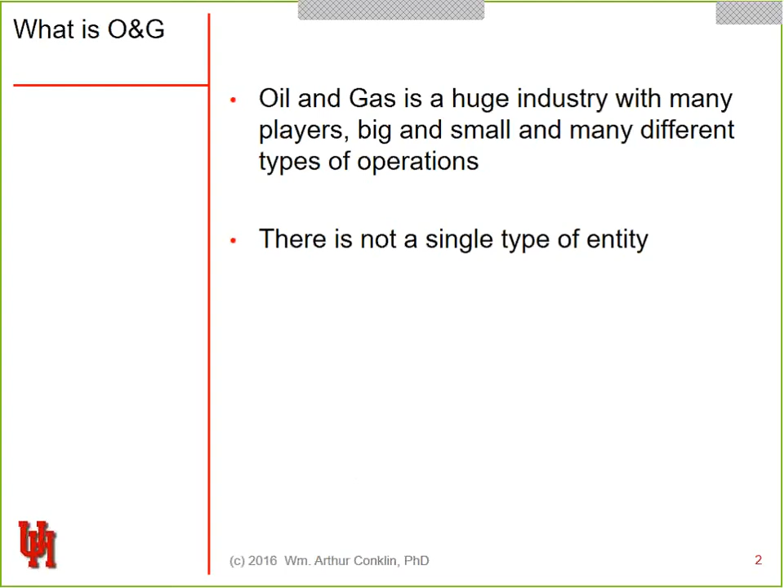And we have many ways of slicing and dicing this industry, and so these are terms you're going to hear all the time, and they're going to be important when we interface with oil and gas companies. Are we talking an upstream operation? Upstream is where we do the exploration. We actually go find the energy in the ground, so to speak. Downstream, once I find it in the ground and I get it out of the ground, I got to put it in somebody's gas tank. Well, to do that, I need refiners, I need retailers, customers. To connect upstream to downstream, I have pipelines. We also have marine segments because a lot of this is moved over the water.

And then we have another major area. It's outside oil and gas, but it isn't. It's called service and supply. There are a lot of companies that exist solely to support oil and gas. So when you have an oil well, say the Macondo well sitting in the Gulf of Mexico that made news, how many companies are on that platform? Tons of companies, and some of them with literally billions of dollars at risk. So it's not just one company.

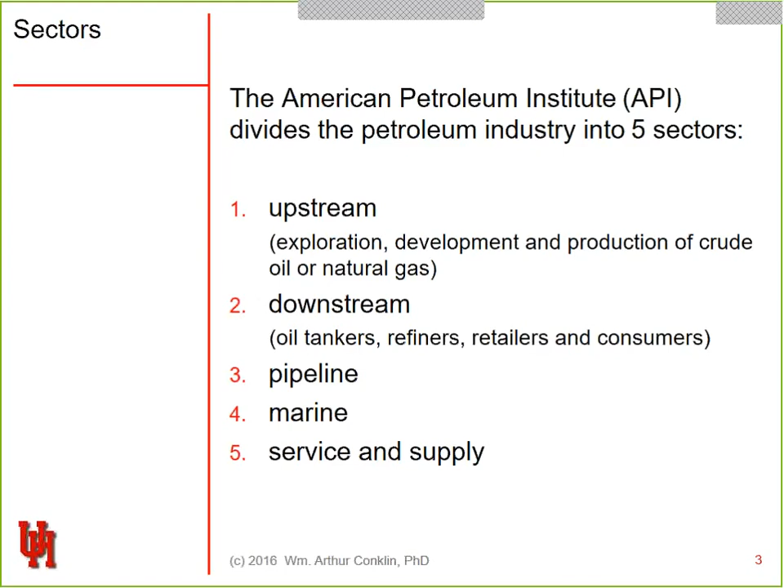You've got a service company that's handling not just the maintenance, but how to make certain that the right mud, the right things are being put in. You've got another company that's responsible because they actually own the lease. You got another company that their specialty is actually drilling into the ground to get the oil for the lease. And so a lot of this stuff is done through cooperative ventures, and you'll see a lot of times where two major oil companies will go together on a cooperative venture in a foreign country to develop something, and then they hire in all these other people. Next slide, please.

And so the supermajors will bid and get rights to pull the oil out of somebody else's possession. And so oil that's sitting in Azerbaijan or Nigeria or Venezuela, it's typically owned by the state in the country that it's sitting in. And then they sell the rights to supermajors to come, in essence, harvest this. Next slide.

Now, one of the things that I skipped when I looked at upstream, downstream, we've got this whole area called midstream now. And realistically, if I break it upstream, downstream, midstream firms are part of what I would call downstream activity, but they're specialized. These are companies that do things like gathering. They connect wells to processing. So I have wells all over, say, the Gulf of Mexico. There are 160 oil or gas platforms in the Gulf of Mexico pumping gas out of the ground.

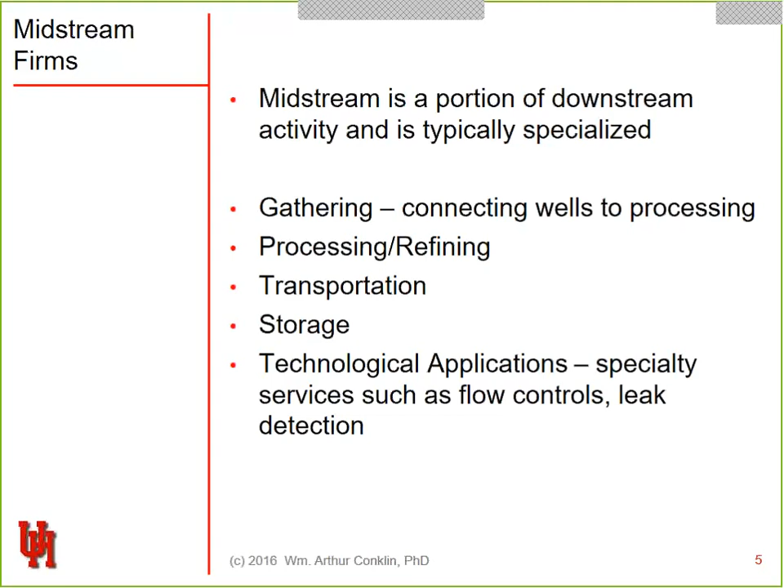And so our air pollution in Houston, where we have all these refineries across all the way to New Orleans, it's actually really good. Our air quality is great. Why? If they let this stuff into the air, they can't sell it. And so they've gotten very, very good at managing this stuff. And midstream firms have had a big role to play in that. Next slide.

So let's talk about what some of these firms are, because I had the Supermajors. These are the ideas of the types of firms you're going to see. Companies like Enbridge, which is a pure pipeline play pretty much, or Kinder Morgan. Then you've got natural gas companies like, for instance, ONEOK, which actually used to be Oklahoma Natural Gas. You've got Genesis Energy. They primarily do storage, although they also have to move it. They're just not a parking lot for oil and gas.

A lot of these companies started in one area. Williams started with pipelines, then they moved into processing and transportation. Typically, companies in the midstream either focus on a gas product or an oil product or some piece of it. There are very few that are large-scale plays.

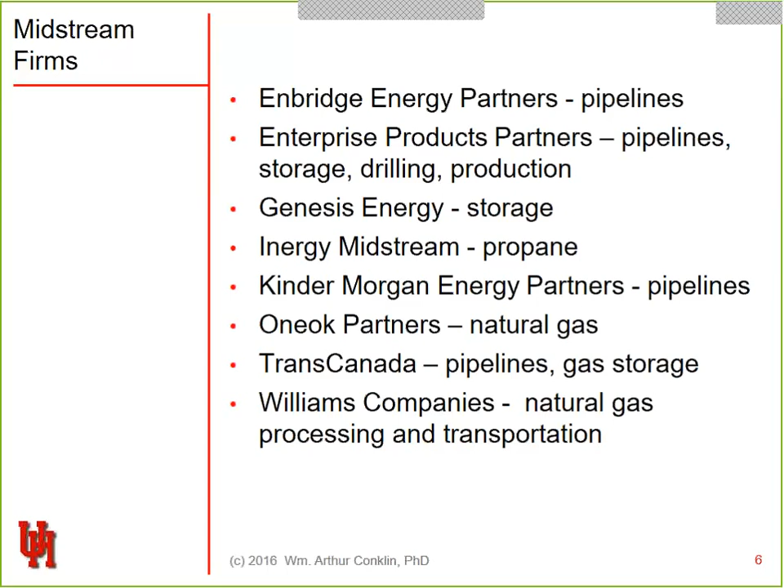The exception to that is Enterprise Products. They do pipeline, storage, they even do drilling and production, and when they buy a refinery, and it's just a matter of time till they do that, then they'll be in refining too. They have built their business by buying different companies though, so it's not a pure, one area of expertise. Next slide.

So what makes all this stuff flow? It's money. But it's kind of an interesting flow of money. First of all, the price of oil is not set by the oil companies, the people pulling it out of the ground, the people that own the ground. It is set by markets. And these markets set it using the U.S. dollar. So U.S. currency and how our government values or devalues currency.

So if we have a strong dollar, that affects the price of oil. We have a weak dollar, that affects the price of oil. And so you have many, many different factors. You've got people out there speculating, you've got demand, you've got supply, and then you have literally OPEC can decide to turn the faucet on, turn the faucet off to their lands. So it's created a ton of boom and bust cycles.

The 1980s, there was a bust cycle. It was devastating to the energy markets worldwide. The firms learned from this and changed. So let's look at the current bust cycle. Right now, we are definitely in an energy bust cycle in oil and gas. The price of oil has fallen to very low rates, but not historic low. A 60% price drop, but they've only done a 30% employment drop.

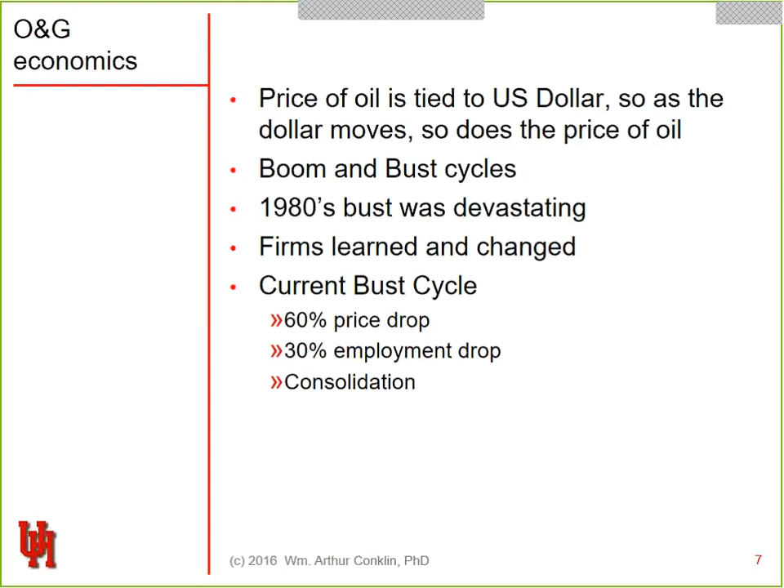The rationale behind that, they expect the price to go back up, and it is too hard to get people back and restart. They've had problems in the 80s getting the oil patch back up and running. The other factor is they've done a lot of consolidation and changing of operations. When I describe upstream, downstream, midstream, these companies all have learned from the past. No one is a pure play dependent on the price of oil. Next slide.

So when you spend $5 billion on maintenance and you do it in 3 months, you can imagine the burn rate. You can imagine how much is set up. Things cost more. So when people start saying, whoa, this stuff's too expensive or they make too much money, you've got to realize that everything has extra zeros just because of size. Next slide.

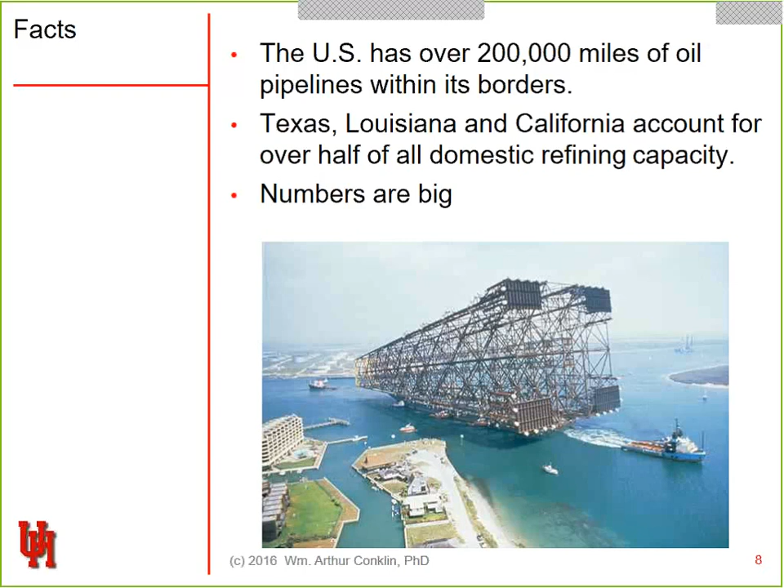aspect. So no matter where the price of oil goes for ExxonMobil, even if it goes down to, say, 25, and OPEC says, we're going to send it to 25 because we want to crush the U.S. oil industry, it will stop us from pulling oil out of the ground in the Dakotas. It'll stop us in Texas. It'll stop us in a lot of places. However, using storage and other sources and reshifting my operations to like chemical production and things, I'm still going to make money.

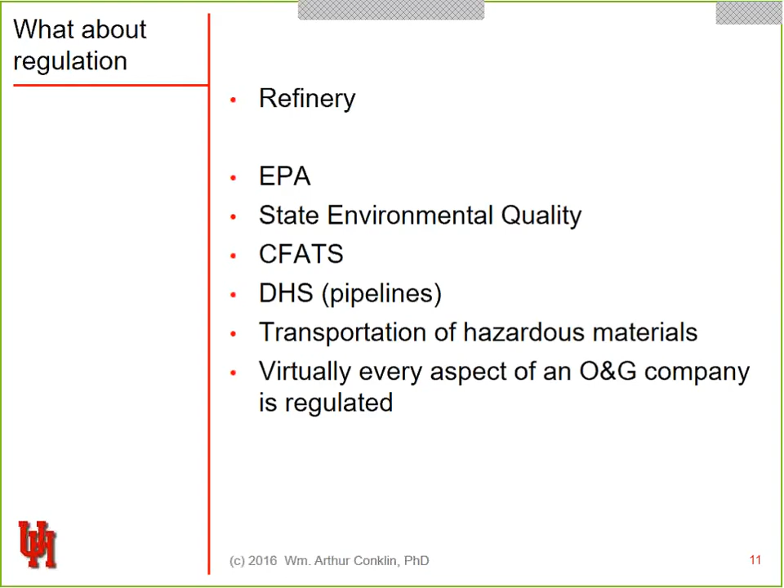Electricity. This whole project started in electricity. Trust me, oil and gas companies understand electricity more than you realize, because most major refineries have cogen facilities on board. The reason they have cogen facilities is because it takes a lot of energy to process energy. And so since they have things that they can turn into kinetic energy, which then can be turned into electrical energy, why would they pay a local utility for something they can generate themselves?

And so most oil and gas major facilities have really been built to be self-sustaining. They own their own ships, they own their own tankers, they own their own pipes, they own their own electric generators, usually gas turbine based.

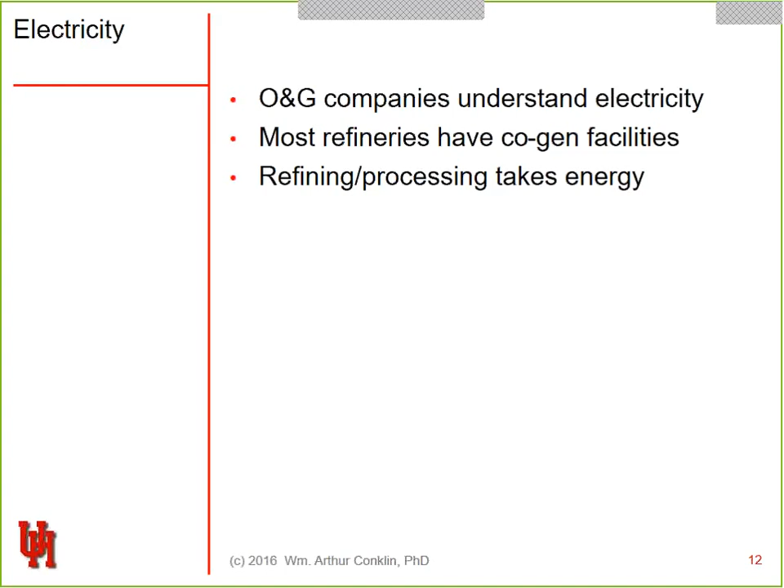They understand how these things fit together. Next slide.

Standards. Way too many to list, but let's look at some of the main drivers. One of their main drivers from, I'll call it, this grant-specific side, from a security, from how I architect things, how I look at my SCADA things, was ISA 99; it's now ISA IEC 62443. They built to this standard and they were involved in the building out of this standard, so most of their systems are in some form or fashion compliant as this standard series continues to evolve.

On the IT side, and these companies have large IT infrastructures, they do play with the NIST 800 series. CFATS gives them a series of standards they have to play with. The killer, though, is the myriad of stovepipe industry-specific standards. So when they're making their own electricity, they're not subject to NERC CIP because they don't actually do bulk power generation, because it's only on their own site, and there's no 15-minute rule for them. However, they have adopted a lot of the industry standard stuff because they have to keep their stuff up and running.

The same with gas. The American Gas Association, AGA, they have a whole series of standards. And so where they're moving gas, as in natural gas, they use that stuff. The same with pipelines, the same with water. By the way, refineries are almost always placed on the water because they use a ton of water in part of the process for cooling.

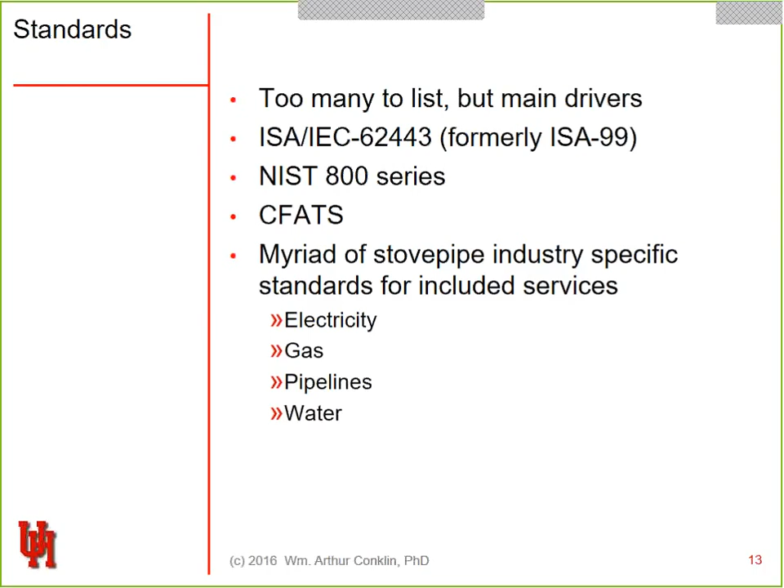Next slide, please. Protocols. I know in the SCADA industrial control space, we have more than enough protocols. When we look at the oil and gas space, what's interesting is we don't have a single installation. If you walk into a refinery, there may be 200 or more different SCADA circuits, from literally 200 different vendors put in at 200 different times using 200 different protocols. Everything was built the way it was. There is no real standardization.

It's not, if I go to Exxon, they only use company X, they only use standard Y. Each one of these has been built over decades, and so they use what they got the best bid on when they were putting in that particular line. And so you're going to find that your plant workers are actually fairly proficient in a bunch of these, and you have to pick and choose what works best for each one. Next slide.

Almost all of them are still adhering to the old ISA 99 Purdue model system. I'm not going to spend a lot of time on this model. This should be familiar to everyone. They really do use this all throughout oil and gas. Next slide.

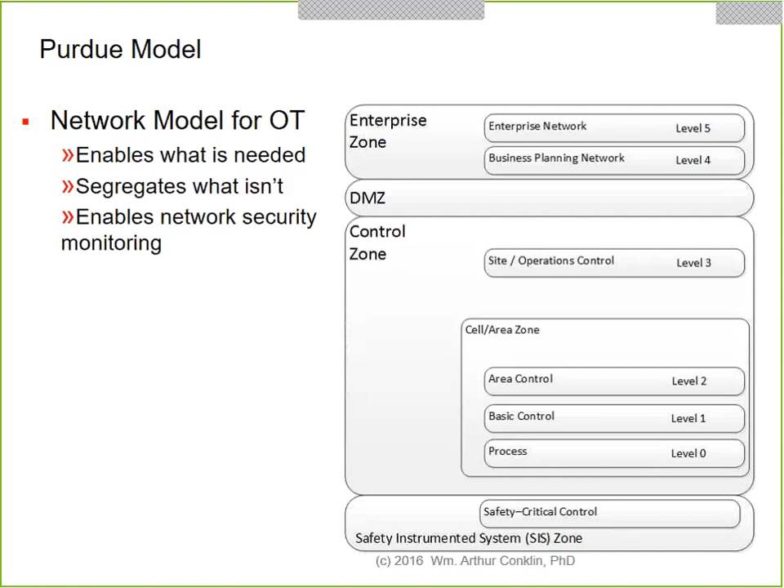So how do we want to think about oil and gas? We have to think of this as a community of collective industries that are working together. Petroleum is their medium, and they're doing certain things with it, but it's bigger than the petroleum. There are all sorts of challenges in their business model everywhere you turn around, and there are a lot of opportunities. They are moving, and they've been moving for a while, but they're big, so it takes a long time to move everything to a digital world where they want to digitize everything and understand the numbers.

A modern refinery can produce a whole lot more than it used to, not because of better chemical processes, but because literally their information is much more up to date, and they produce what they want, where they want, when they want it, at the most efficient times. And that's because of the quote-unquote digital energy movement. And so that's a place where there's a lot of opportunity for resiliency in the things we're looking at. Next slide.

But before we get too upset or too excited, let me tell you, when you talk to a major oil and gas company, what their main concerns are. Their first concern is safety. Their second concern is safety. Their third concern is safety, and I'm not joking. If you walk in a Chevron office building holding your cell phone, looking at emails while walking, they will stop you and tell you either do your email or walk, don't do both. If you walk up and down stairs in any of these facilities and don't use a handrail, they'll call you on it. They really do believe in safety.

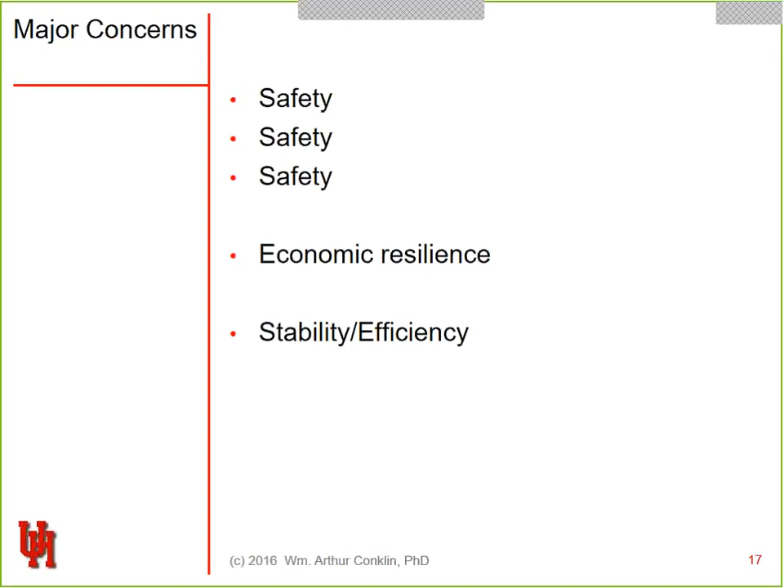One of the things you're not going to do is go in and say, well, you're at 4 nines and I can get you to 5 nines. They've already done that. They've already figured that stuff out. They're more interested in what can go wrong, what sort of things are going to interrupt me. So they're looking at stability over efficiency. Next slide. And I think we have 2 minutes left.

Hello, this is Stuart. Let me ask you a quick question. From our interest in cybersecurity and resiliency, if you were asked to identify the biggest risk or danger they're facing, what would you say it is? How to migrate old systems to new standards, how to modernize their facilities without incurring extra costs against an adversary that now is paying attention to them.

They have a ton of legacy things that they've had to connect to the internet because they needed to connect them to their enterprise systems, and they cannot afford to just jump in and replace PLCs, replace networks, make huge changes. It's just too big a problem. So what can they do to identify things that will seriously interrupt them?

All right, well, I'd like to thank both of our presenters for giving us a good high-level overview of the 2 primary energy delivery sectors that are of interest to this project. Next week, it will be a couple of presenters from Washington State. We're going to get a little closer to some of the core activities of the project, speaking specifically about resilient communications and controls and the cyber issues that come up there. So a hand for Pete and for Art.